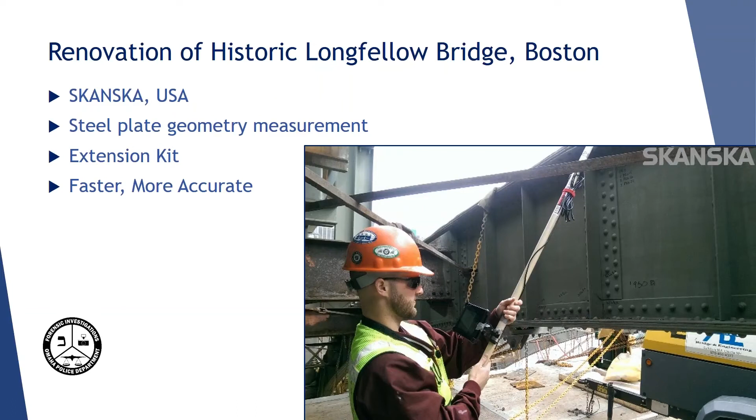When they ended up doing a study on it, they actually determined that this was not only a faster method of measurement, but it was indeed more accurate than their traditional methods.

So this is a picture of the sensor portion of the scanner up above. You can get some idea here of how difficult it would be to get a person in position to do that. We're either going to have a platform or a lifting device or somebody roped off and hanging from high steel in order to get these measurements.

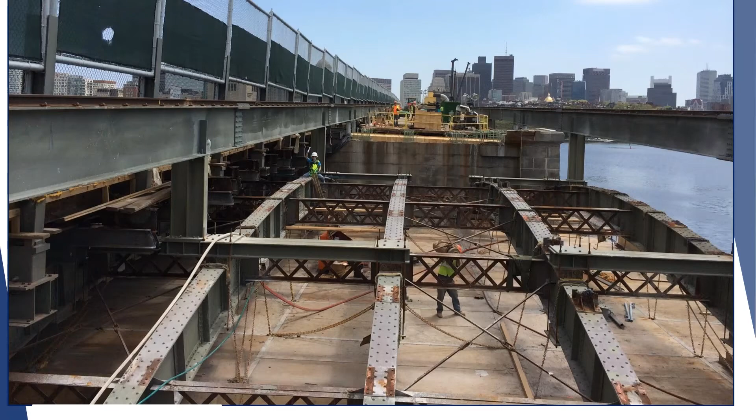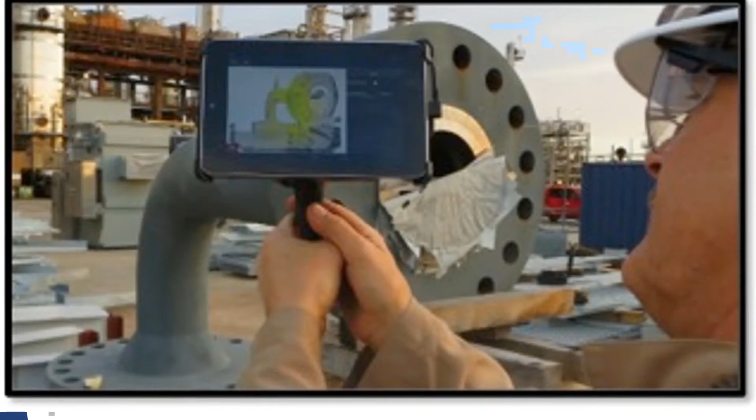That's another overall picture of it, again giving you an idea, analogous to a lot of crime scenes, not an easy environment to work in. And then that's the instrument itself put together.

Skanska did some examinations of their traditional measurement methods versus the DotProduct measurements, and you can see from this table that they found they were more accurate and their speed of capture was faster, and so the whole project ended up costing them less.

From a crime scene investigation perspective, this is important to us because we want to get actionable information and evidence out to people as fast as possible. This is an objective study that shows us that that's possible, or that there's something to be gained for us in a crime scene investigation perspective.

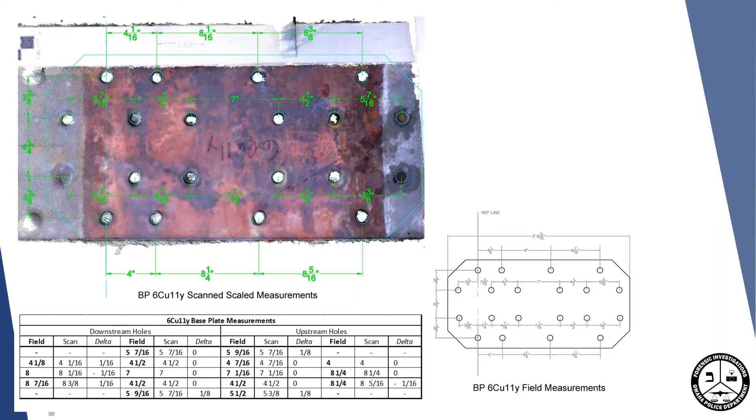So our proposed uses for it, after we decided we were going to adopt it, was that it was going to be a contextual and supplemental scanning device for our tripod scanner at major case scenes or more complex crime scene investigations, that we would probably end up using it for field measurements at smaller crime scenes or at crime scenes that were of lesser order importance. What I mean by that is questionable death investigations or smaller shooting scenes.

What looked like it was a powerful tool with regard to this instrument was that it allowed us to do quick distribution of 3D data sets. If I remember properly, DotProduct claims 50 times lossless compression, maybe even 100 times lossless compression on their data sets, which is pretty impressive. I don't know of anybody else whose data sets can be emailed or texted.

That kind of stuff is just unusual in this field. So we can get this stuff out to people very quickly, whether by physical transfer on a disk, or we can even email it if you've got a Wi-Fi connection or some kind of wired internet connection.

The one thing we have not fully realized, but was one of our proposed uses, and I don't see any reason why it couldn't work, is crash reconstruction, specifically measuring crush on accident vehicles.

So we went with this solution, and this is the version that we bought, the DPI-8. It's a sensor, Carmine PrimeSense sensor on the front, attached to a tablet.

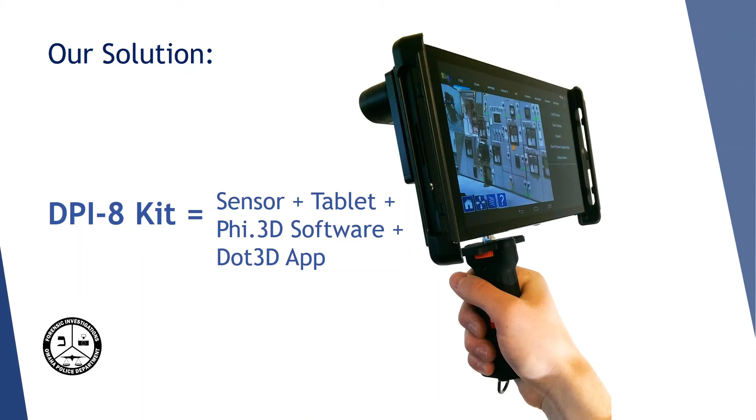The newer version of the DPI-8 is the X, and I really like this. I saw this housing first at the last IAFSM conference and was really impressed by it.

That's fully enclosed now, but now I can put a neck lanyard on it so that in environments where I'm not worried about hanging myself up, I can let it drop and hang at my waist when I'm working on other things. But still easy to remove the tablet.

On the front of the unit, we have rubber mounted bounce pads. One of the things this unit is sensitive to is jarring, and so that's protective. The fact that it's a hard armor around the outside is important to me from a crime scene perspective.

We're not always working in nice environments, and it's flat-footed so that I can set it down and not have to worry about it falling over or damaging the equipment. So we are probably going to upgrade to this as soon as possible.

The next thing I want to talk about is our validation study. Anybody who's going through the accreditation process or who's been accredited will recognize this process. When you adopt new technology, you've got to prove that it's fit for purpose before you recommend its use, and that's what we did here.

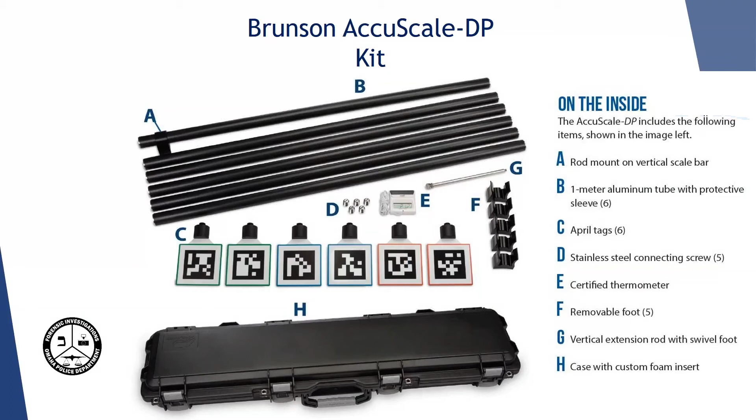So here's a video of that kit being put together. We've got some studs that link the rods themselves together in whatever configuration you choose.

And this is not me in this video. I think this is Chris Ahern from DotProduct, actually. So we just attach the April tags to the end of these bars.

This process is basically an extension of a recommended best practice by DotProduct. When we first acquired the device, their recommended best practice was a scale bar targeting or introduction of known measurements through total station or some other method into the scans.

You can see here this one bar is unique in that it can have a foot attached to the bottom of it, and it can stand vertically to give you your Z-axis in the scene.

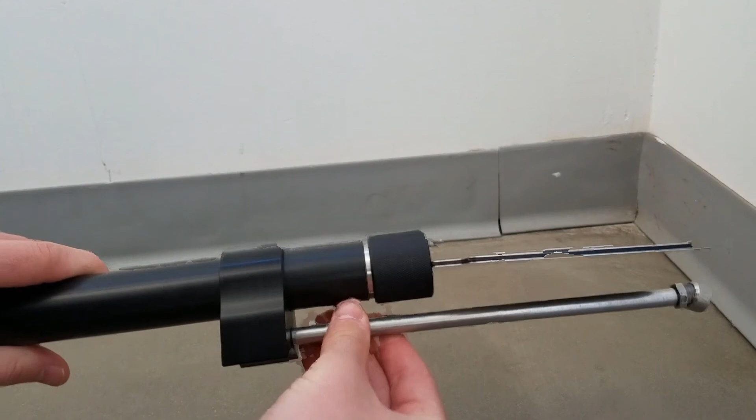But getting back to what I was talking about, it was recommended that you use April tags or checkerboard targets at known distances inside your scan to give that calibration of the overall scan to improve accuracy.

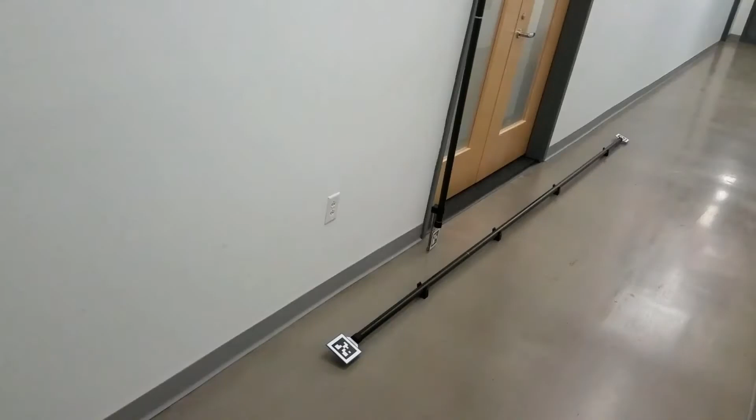And so here's a typical 3-bar setup within a scan. There's a 2-bar setup, and then I think they're going to show a 6-meter bar, 1 tag at each end. So you can put this in a lot of different configurations depending on how big your scene is.

And when you go to use it, for those of you who haven't seen the scan operated, you're actually going to enter this temperature when you do the optimization on your cloud.

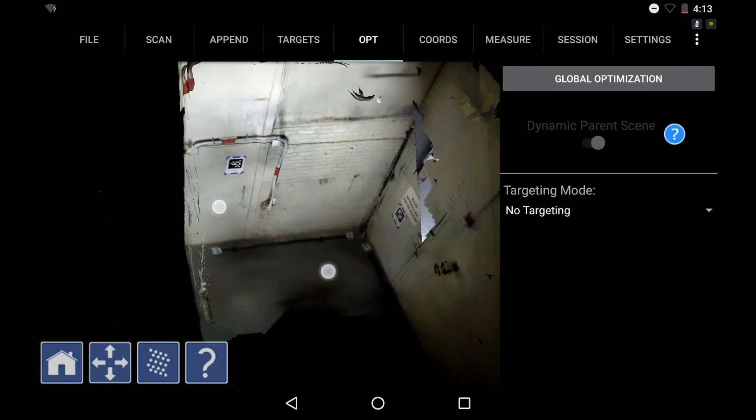The scanner itself operates much like a video camera. As we move across the scene, you see it automatically recognizing those April tags by turning them red, blue, and green. Those are used to register the frames between the video, used to calibrate, and used as a reference artifact. So really a neat integration of reference artifacts into the on-scene capture, similar to what we do with our Leica scanner.

So there you see you've got an environmental temperature. It's recognizing those bars at 2.2 meters, and then it will automatically calibrate based on what you've given it with this AccuScale kit.

And while the scanning process was sped up there, this is pretty much how fast it does optimization and post-processing. So pretty quickly you've got a finished result that's well calibrated, tied to reference artifacts in your scene. That in and of itself is an important thing to us from a forensic standpoint.

The study we chose to do, we wanted to conduct under conditions that were deliberately difficult. Any kind of video tracking device is going to have difficulty in an environment with a photo gray background, where there's very little pattern on the floor, walls, or ceiling. We are interested in how this device will operate in realistic conditions, so we gave it some difficult stuff. The one concession we made was a couple different April tags put in the corner. But as you can see, this is a photo gray background without a lot of pattern in it.

There's some geometry to the scene which is required for structured light. This is a near infrared structured light device. We've got to have some kind of relief in the objects we're measuring in order to get an accurate representation of it. So we did choose a corner, but other than that, this is not an easy environment for structured light scanners.

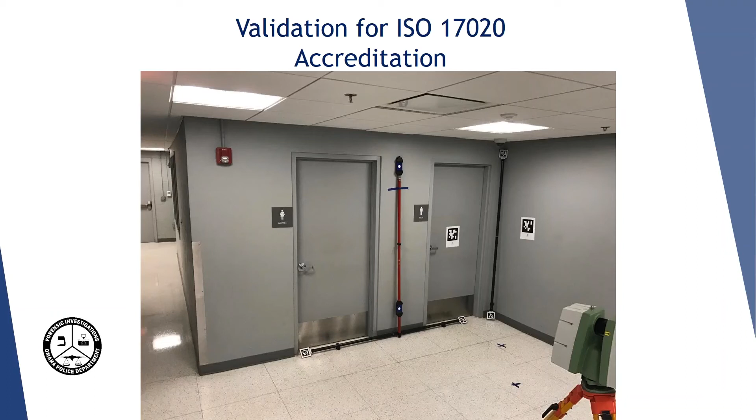We had 3 different people take measurements, and these are user-chosen pics of the measurements of that Leica NIST pole within Cyclone. We're going to compare that to the NIST stated length of that pole. The scanner resolution we used for the C10, again, not a high resolution scan — this is what I would call probably a medium scan. These are the settings we used: point spacing of 0.085 feet at 100 feet for this particular scan for the validation study.

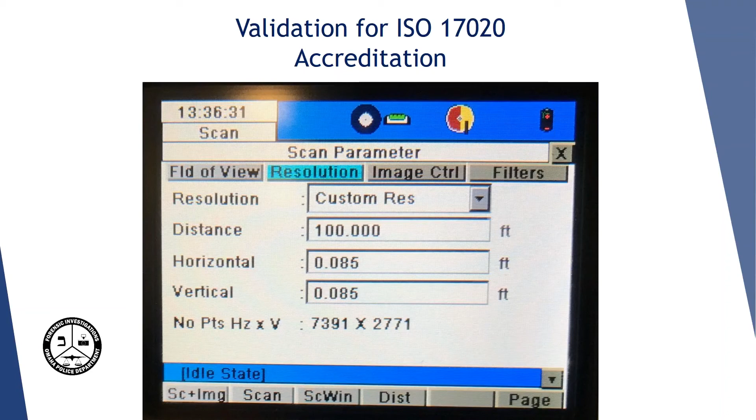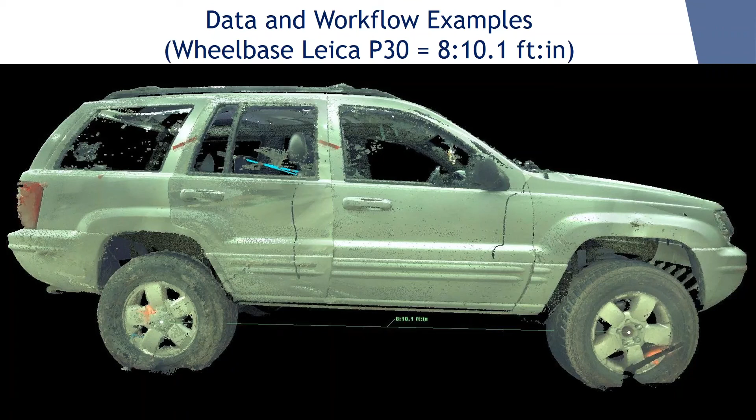So the wheelbase on this vehicle with the tripod scanner is 8 feet 10.1 inches, and when we do the DotProduct scan, which again was kind of at the limits of what they recommend, our measurement is 8 feet 10.0 inches. We took a couple different measurements here just to get a range, and this is about the median of the variance we got. Some went down to 8 feet 9.9 inches, some went up to 10.3 inches. But this is about in the middle of what we expected and what we found from different users picking the wheelbase length on this particular vehicle from this incident.

It was much easier to capture the interior of this vehicle with the handheld scanner. If we were forced to do that with a tripod scanner, it would have been a lot of different scans and a lot more time invested. The important thing here is that you can recognize you can use this as a standalone measurement device.

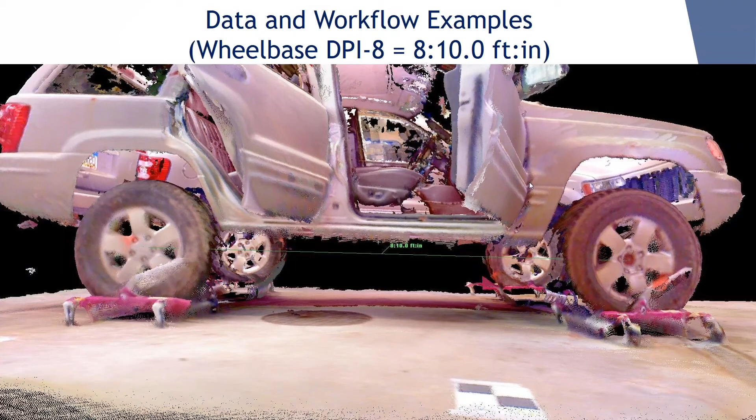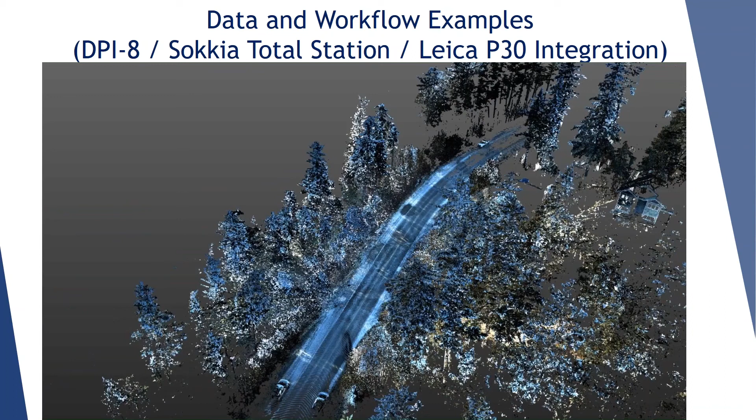So this is a video kind of illustrating the scene that this came from. The scene itself is unique in that we were scanning and doing 3D data capture on the scene three days after the original incident. There was a scanning process, a total station capture process with a Sokkia total station on the day of the incident, which gives us point-to-point measurements and some survey control that we can tie everything else to, including the position of the vehicle we just looked at.

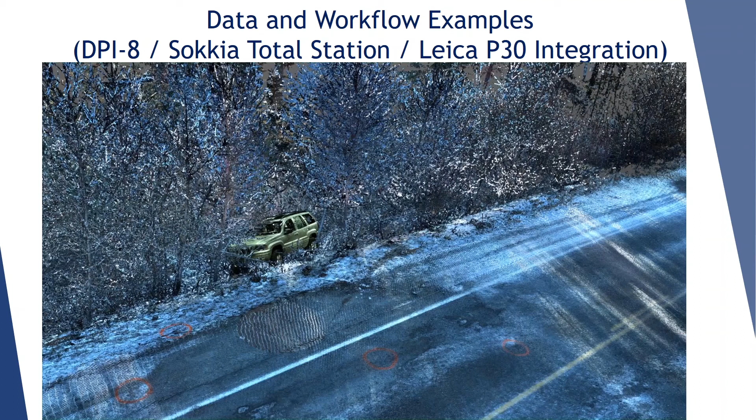We did tripod scans of the scene itself, tripod scans of the vehicle in this agency's garage, and then DotProduct scans of the vehicle in the agency's garage. Just for kicks, we did a comparison on the integration using the tripod scans from the vehicle and the scans from the DotProduct scanner. There was no appreciable difference. The vehicle marks made on the ground and the total station data collected lined right up with the wheelbase of this vehicle. So again, no appreciable difference in an appropriate circumstance for the use of this scanner.

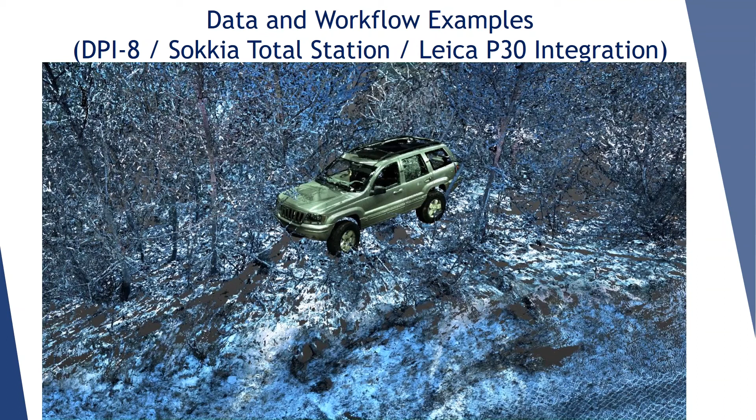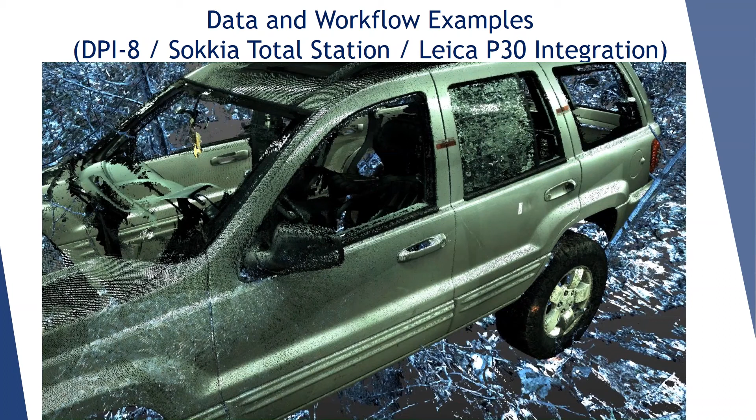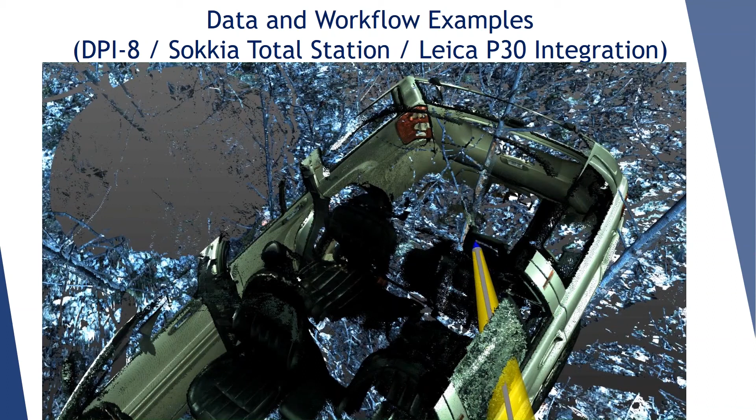Now, you will never scan a scene like this with a handheld scanner entirely, but it definitely plays a role in getting information out quickly, verification that you have your data captured on site without question, and in the ability to transmit this data to other people. So the only reason we show this is to demonstrate again that DotProduct data integrates really well and precisely with multiple sensors and data from multiple sources.

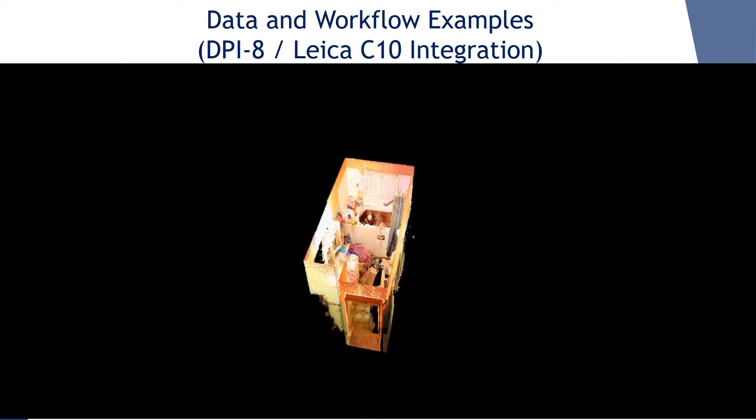This is another case example. In this instance, it's a questionable death investigation that takes place in a bathroom inside a house. There's a lot more data collected here, but we narrowed it down to just the important part that integrates with DotProduct. The tripod scanner it integrates with in this case is a C10 scanner, and there's some difficulty reaching areas of the scene that turned out to be critical to our investigation. This is a walk-in tub.

You can see there's an individual in the tub that's a pretty substantial size. She's been in the tub for a considerable amount of time, and it's a difficult area to get to on the opposite side of this tub wall. Our laser scanner had some real difficulty getting in there. We'll look at some stills of this later, but you can see the data line there, those light-colored points across this individual's face, is the gap or seam between DotProduct data and C10 data.

So like I said, this is a small environment, a lot of geometry, definitely good for DotProduct, but it's a walk-in tub, it's tough to get to. You've got occluded areas behind that bathtub wall, at the water line, and behind the curtain. Hanging a scanner from the ceiling in this case was just not an option. Now if you could erect a tripod over the top of the tub, but that gets into all kinds of scene contamination issues, which we didn't want.

Here's a couple other examples of integration of tripod scans and DotProduct scans. This is my own basement, our rec room. We've got a P30 scanner there integrated with DotProduct data. The colored data in this case is the DotProduct scan, and the intensity value data is from the tripod scanner. It integrated really well. Again, we used the scale bar targeting method, which I think would be much easier with the AccuScale kit, so that's another consideration for us on a purchase in the future.

If the bandwidth will take it, I just wanted to do a quick Dot3D live demo so folks can get some impression of how that can be used to distribute data and make deliverables. This is when it initially came out we were using it in beta form, but it's fully developed now.

As I mentioned earlier, you can have the licensed version, which comes with your scanner if you buy one, or it can be freely distributed as a viewer version for your end users to view the scans. As long as they have access to email or some kind of data delivery, they can open this up on their mobile device or PC.

In this case, we're going to look at the scan I did of our rec room in the basement, and I'll just show you some tools we have in here. It's pretty easy to navigate - you're not going to spend a lot of time teaching folks how to use this viewer.

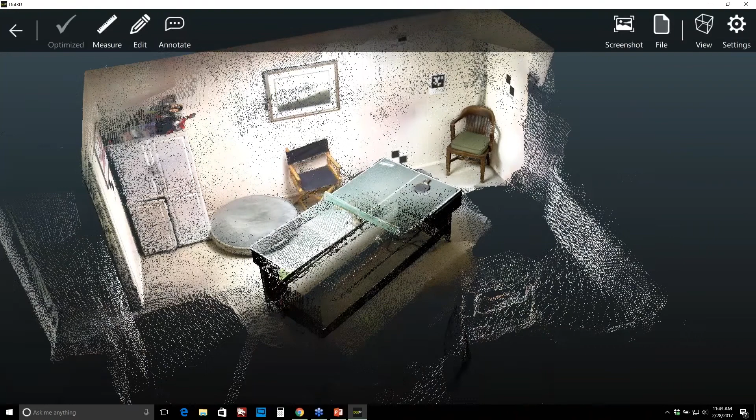If I hold down on the wheel, I can pan. If I roll the wheel, I can zoom. And then I have these tools up above for measurement, edit, and annotation. Now the viewer version, I believe, only has measure.

You would have to do the annotations and editing if you chose to do it in this format on a licensed version. But the deliverable that goes out to the viewer version can be measured by the end user.

So I'll just show you how this measurement works. We just long press - it gives me a movable end, and then long press to get the other end. I really like this feature that this end can be moved to different locations if I choose to measure, or if I've missed the pick on the start. It is sensitive to the data capture that you used in the beginning, so you've got to be careful of that.

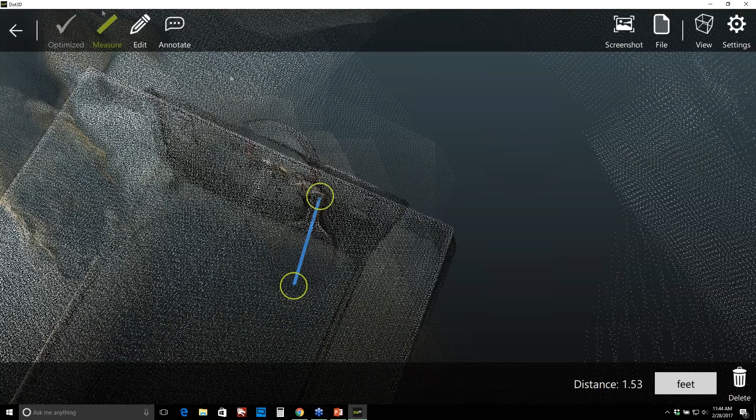I can also annotate this through a long press. And when I go to save this cloud now in the licensed version, that annotation goes along with it. So any evidence that I want to point out, any particular observations I've made in the 3D cloud, go along with this cloud whenever I save it and distribute it.

I have a kind of rudimentary edit feature, which is nice in a light piece of software like this, that I can use to crop pieces of the cloud out or cull noise from it. So let's say I want to take this piece of furniture out - again, I've got movable grips, I can choose the method, and then crop it out. Now I've cleaned that portion of the cloud out.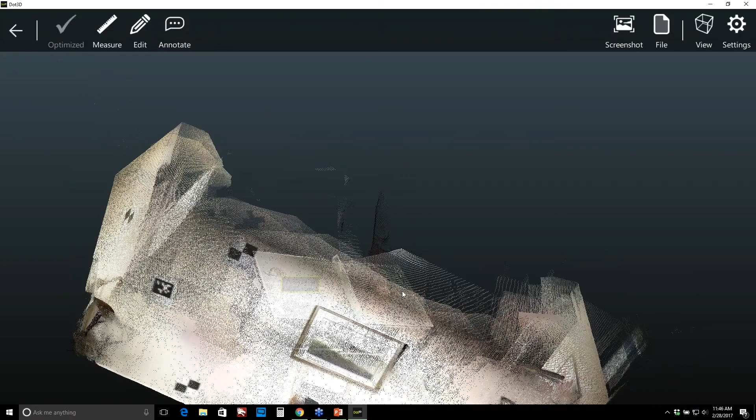What I'm curious to see, and what we haven't had time to test yet, is whether we can take advantage of this tool and the compression of the .dp files, which is native to DotProduct, when we bring in PTS and PTX files from other clouds. So I'm going to be talking to Tom Greaves and Chris Ahern about the viability of that. There are other tools out there - LAStools is one of them - but this might be a possibility for us. It's easier to operate, a little more user-friendly, if it can handle those large data sets, and that's the question we have.

But other than that, that's about it for my presentation. I hope that was useful to people, but I'm more than happy to answer questions.